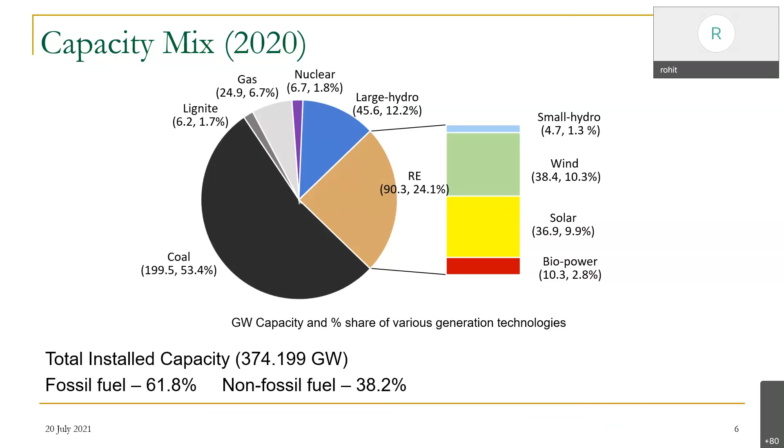The total installed capacity, this is last year's data: the fossil fuel generation is somewhere around 61%, 62%, and the rest is non-fossil fuel generation. So this is the general capacity mix that we have as of now, and this is shifting towards more and more renewables over a period of time. It is significantly shifting.

The targets that the government has set for itself by 2022 are 100 gigawatt of solar, 60 gigawatt of wind, 10 gigawatt of biomass, and apart from that, a target for a lot of small hydro sources. With that, the total renewable energy generation in the country, percentage-wise, take care that this is the energy generation. This is not the installed capacity.

Installed capacities for renewables are usually higher than the share of the energy that they can provide. That is because these renewable sources are intermittent and they do not provide power at all points of time. Because they are intermittent, despite having good capacities, the level of electricity generation or energy that they can provide is significantly lower as compared to the capacity.

So when we talk about capacity, the RE capacity may be somewhere around 40%. But when we talk about the energy that they are supplying, that is relatively low, somewhere around 21%. That is typically because of their highly intermittent and variable nature, which does not provide a consistent level of energy generation from these sources. Hydro, large and small, constitutes somewhere around 12% of generation. Solar, wind, and biopower constitute about 9% of generation. This is the RE mix portfolio.

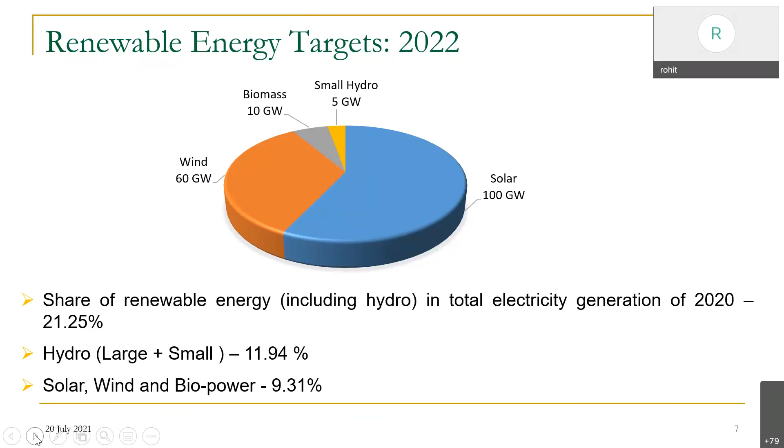Focusing upon the topic of this presentation, that is, what are the challenges with this RE generation? What are the problems that we are facing from the system operator and system planner's perspective? This is what I would like to focus upon today. We all understand there are significant targets and the government is pushing forward like anything to fulfill those targets.

What are the problems? The first problem is the high cost of putting up those projects. High cost of solar panels, high cost of wind turbines, that is one of the big issues. However, over the last 5 to 7 years, the cost of solar generation has drastically reduced, which has helped us to put in more and more solar, fulfill our solar generation targets, and bring down the per unit cost of generation from solar, not the running cost, but the overall cost of generation.

The running cost is obviously negligible in case of solar and wind, but the installation cost is high and they have a specified lifetime; the solar panels need to be replaced after a certain point of time. They do not have a lifetime of 40 or 50 years as is typically the case with coal power plants. They have smaller lifetimes, 20, 25 years is the maximum that solar farms can be operated, after which their panels have to be replaced because of low efficiency and degradation.

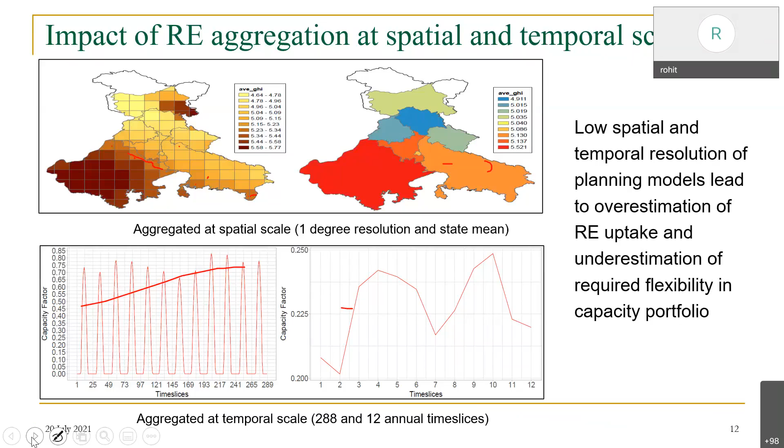Right assessment of the potential is not happening, which is eventually leading to an overinvestment in the system, investment whose money cannot be recovered. We are putting up those power plants, but we are not able to utilize them because of the time at which that generation is available. Possibly when we were doing the planning, we were not able to understand the spatial and temporal resolution of those power plants, and we are not able to derive the maximum generation from those generating systems. So considering that, there is a need to go in for stronger spatial and temporal resolution of the generating capacities.

They will usually take what is the capacity of generation available, what is the peak generation capacity. They will take one figure for the whole year, whereas that figure is not representative of the generation available throughout the year. That figure keeps changing. During some months, that generation is not available; during some months, it is significantly available. So that detailing is not available in long-term energy planning models, which is required to assess the impact of intermittent renewable generation for long-term system planning studies.

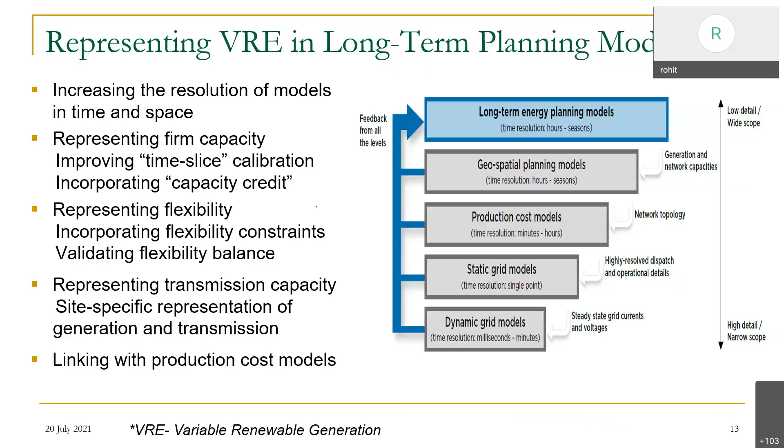So all these understandings help us to do long-term system planning. This is how long-term system planning takes into consideration a larger data set and tries to build up a picture of what the system planning requires, what are the power plants that need to operate. So this was about the planning perspective, how we are doing it.

What are the key innovations that we have done? One of the key innovations that I discussed was going in for a very refined temporal and spatial resolution understanding of the generation from renewables. Another big challenge that is coming up because of renewables on the operation side is that of inertia and the time difference.

The reason is simple. When you've got solar farms or wind farms, as I just discussed, they are connected via inverters, electronic components. Same is the case for wind power plants; they are also connected by electronic circuitry. The turbine is not directly coupled with the grid. So because of that, whenever there is a disturbance in the grid, the turbine in itself is not able to provide that inertial support.

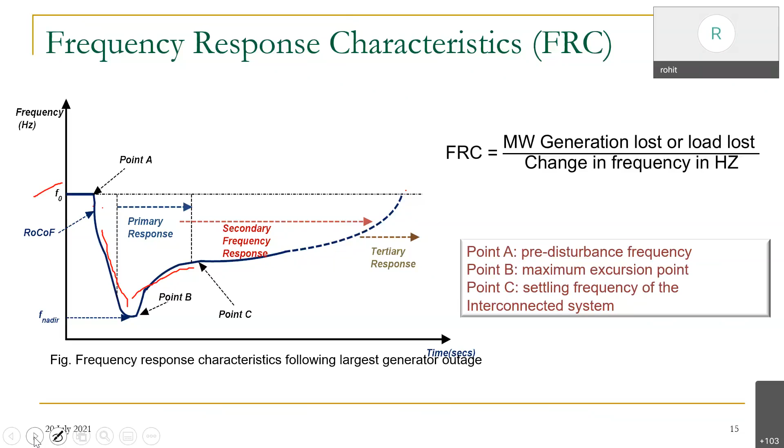So these are the three domains of frequency responses that are being provided by the grid. We'll see how this impacts. The inertial response comes prior to the primary frequency response. The inertial response works in the time frame of 0 to 5 seconds. It tries to maintain the power balance and helps to maintain the transient frequency dip. It tries to minimize that dip. That is the objective of the inertial response.

It works in a smaller time frame. These are the very initial responses that you get from the inertial response, after which the primary frequency control starts acting. That operates in the time frame of 1 to 20 seconds. The aim is again to maintain the power balance and transient frequency recovery as soon as possible. And then the system's secondary control, that is automatic generation control, starts to act in the time frame of 4 seconds to 3 minutes.

Obviously, the automatic generation control mechanisms take some time, but they have got larger capacities and they help to maintain steady state frequency, the transient frequency. Then we also have the tertiary control of the system, which is provided in the time frame of 5 to 15 minutes, generally through economic load dispatch decisions that we do.

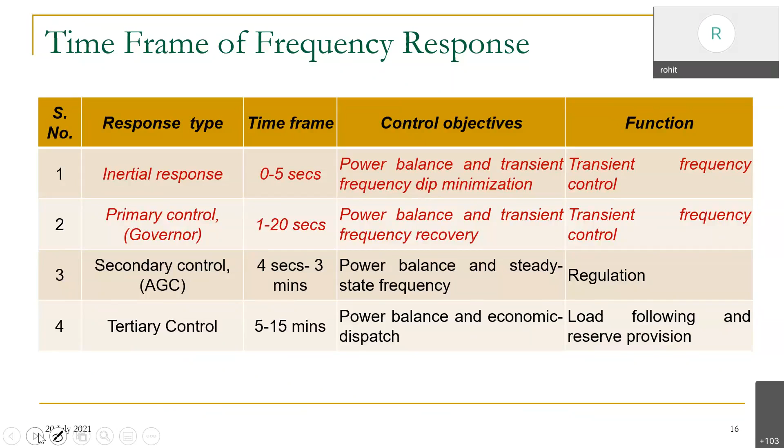Understanding this, the three actions that happen in the grid. The first is the primary frequency control, which happens during the smaller time frame of 1 to 20 seconds. So we have got the generator, the turbine, the governor. The moment there is a problem, this action helps to put more power into the grid; it pushes the generator to produce more.

If this is not able to handle the situation, then we go in for the second level of frequency control, which is automatic generation control, where the inputs are the frequency, the nominal frequency, the power available, scheduled power, the tie lines, and the power lines. Using the automatic generation control, it provides input to the generator to ramp up or ramp down the station.

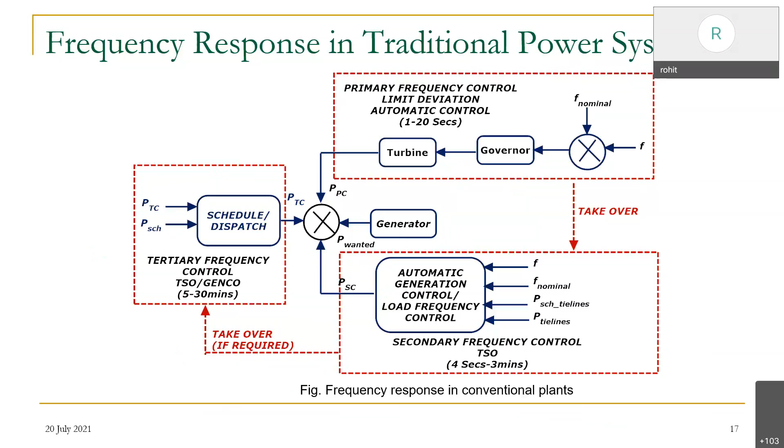Even if this is not able to handle the generation imbalances, that would be taken over by the tertiary frequency control mechanisms by the system operator or the generation company, working in the time frame of 5 to 30 minutes, through scheduling decisions, that is optimal load flow, economic load flow, optimal power flow, dispatch decisions. This is a broader schematic of the reserves, balancing, and frequency management in this country.

Hello, sir. Rohit, sir. Ma'am, you can call, sir, I think. Ma'am, yeah. It's not audible. Yeah, just wait for a few minutes. Sir will be rejoining again. Okay, ma'am. There was some network issue.

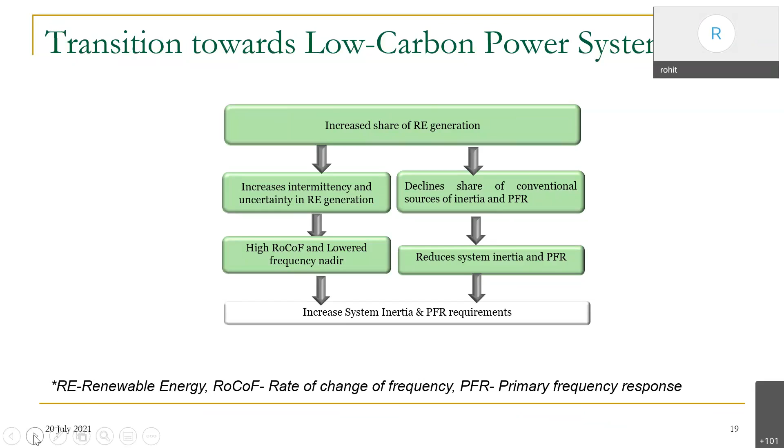That eventually would lead to more stresses in system operation. So these are some of the issues which restrict the capability of the system operator to integrate more and more renewables into the system. These impact the system security, these impact the reliability of the system, because more and more generators would go into outage if the relays start getting actuated.

So we need better governor control in the conventional generators. The governor mechanisms have been overhauled over all these years. More investment is required in the governing mechanism of these generators. Still, there is scope for improvement in refurbishing those generators. A lot of those generators are yet to be improved upon.

Inertia, we all understand, is provided by the kinetic energy of the rotating masses. That is scarce, and it would become more and more scarce if we do not provide an appropriate level of inertia. So there are regulations that have come up from the Regulatory Commission. 10,000 megawatt per hertz of inertia is mandatory to be maintained in the system at every point of time, and 4,000 megawatt of primary frequency response is mandated. That is, this level of primary frequency reserve or primary frequency response is to be maintained at any point of time in the grid.

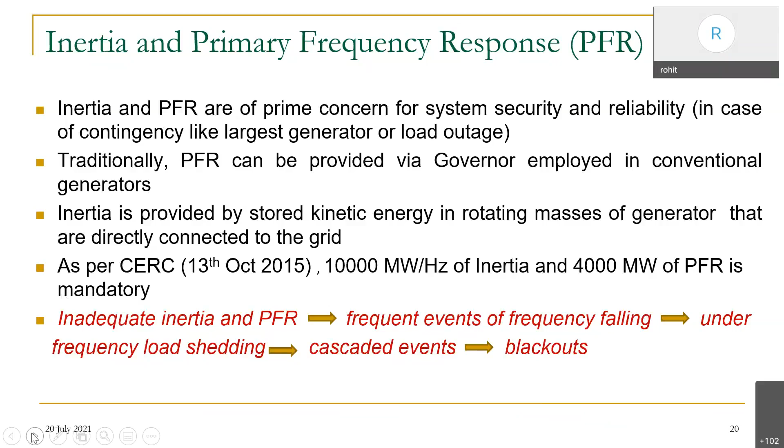This is a learning that has come from the 2012 blackout. Because of that, the system operator was under stress to improve the system operating conditions, which has led to this regulation. After which we have not faced any major blackout in this country over the last 8-9 years. In case you do not have it, we'll be facing a lot of frequency excursion events. Under frequency load shedding would be happening, cascaded events, blackouts, which luckily we are not facing, despite the significant RE penetration over all these years. Still, we are going for a stronger and stronger grid.

Some of the other solutions that are being explored are in terms of putting up more energy storage. So when you're not able to get the required energy from those power plants, other options are putting up energy storage devices like pumped hydropower plants, flywheels, compressed air energy storage, battery energy storage systems. Or you could also operate these RE power plants in a derated state.

That is, if it is a 100 megawatt power plant, you operate it at 80 megawatt so that whatever intermittencies happen, you mitigate or subsume those intermittencies in the power plant itself. So even if the generation level is 90 megawatt, you are still operating it at 80 megawatt. If it is 85, still you are operating it at 80. Even if it goes to 100 megawatt, you are still operating it at 80. So whatever variation is happening in the range of 80 to 100 megawatt, since you are operating the plant at 80 megawatt, those intermittencies can be mitigated. However, it leads to loss of generation. So that is the pitfall of operating these power plants derated.

On the demand side also, there's a lot of discussion on bringing in demand side responses for the grid in terms of electric vehicle responses. We have been talking about aggregating the responses from electric vehicles, about bringing in demand responses like interruptible load, shiftable load, and rooftop solar.

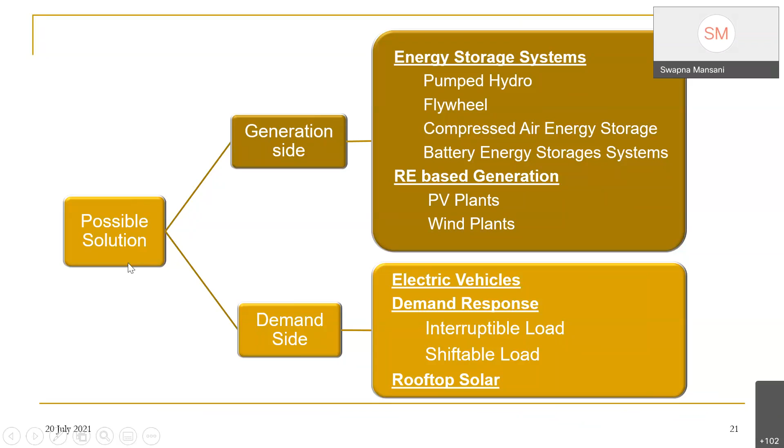I hope I'm audible. Yes, sir, you are audible. Yeah, there was some background noise, so there is no question. Fine.

That was the second issue that we've discussed. Time permitting, we'll be touching upon one important feature that the system operator is quite concerned about. We have been interacting with the POSOCO people for quite some time, highlighting what research we have done, and they are also interested in the research that we are doing and understanding the level of flexibility. Most of us would not have explored the issue of flexibility. There is very little research going on at present in academia. But from an industry perspective, flexibility is becoming a big problem, and there are issues that need to be understood. So this is quite an interesting area of research for system operators and industry practices also.

What is happening is, because of this variability and uncertainty in the system: earlier, the whole of the generation was coming from power plants, and the demand was what was uncertain. When the demand was uncertain, the whole of the generation was increased or decreased to mitigate whatever variation was happening in the demand. So we could fulfill that variation with the help of controlling the generators. If there was an increase in the demand, we would increase the generation level. However, now with a lot of renewable penetration into the system, there is a certain portion of the generation itself which is not controllable.

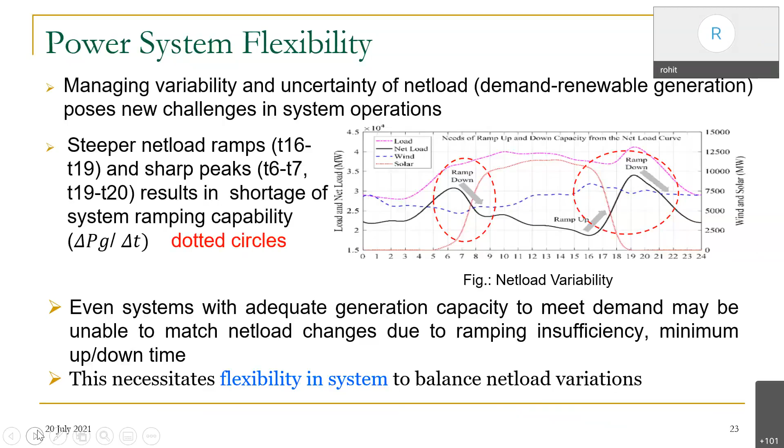How we define it is the extent to which a power system can modify electricity consumption. This is a basic definition of flexibility. There are two facets to it. One is the short-term operational flexibility. That is, the generators do not have the ramping capability in the optimal power flow framework, a minutes to hours framework. We have those resources, but we are not able to schedule them because they cannot ramp up that fast.

The second is the long-term flexibility planning problem, in which we don't have the resources. The capacity is not there. Those types of generators do not exist in the system. So we need to install those power plants which can provide that ramping facility. Typically we talk about gas power plants which can ramp up faster, pumped hydro, and hydro power plants which can start up at a very fast pace. Coal power plants typically require a longer time, so they have limited ramping capability.

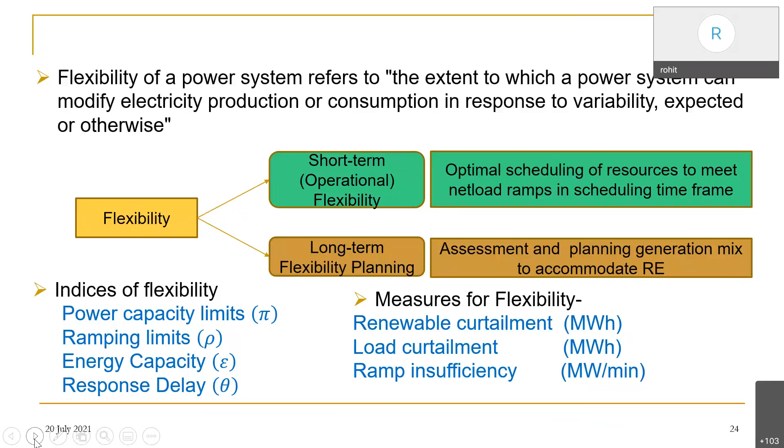Some of the indices that we have been working upon in this segment over the last few years, in terms of assessing flexibility, are the power capacity limit, ramping limit, energy capacity limit, as well as the response time. Some of the measures of inflexibility are the quantum of renewable curtailment we have to do in case appropriate ramping capability is not there, or load curtailment, or ramping insufficiency.

or making investment into the transmission grid infrastructure, or getting more generation side flexibility, or putting in more energy storage systems, or going in for sector coupling, that is, integrating electricity with heat or with the gas sectors. Coupling those sectors can provide flexibility. These are some of the wider research domains that we're exploring, and we see a lot of potential in these in the coming several years.

So energy storage is one important solution that can be explored. This is costly, but yes, they provide very fast responses because they have that capability, especially the battery storage. They have responses that are very fast. So available technologies that people are exploring: pumped hydro, flywheel storage, compressed air storage, flow battery, solid state. All of them are being explored at different applications.

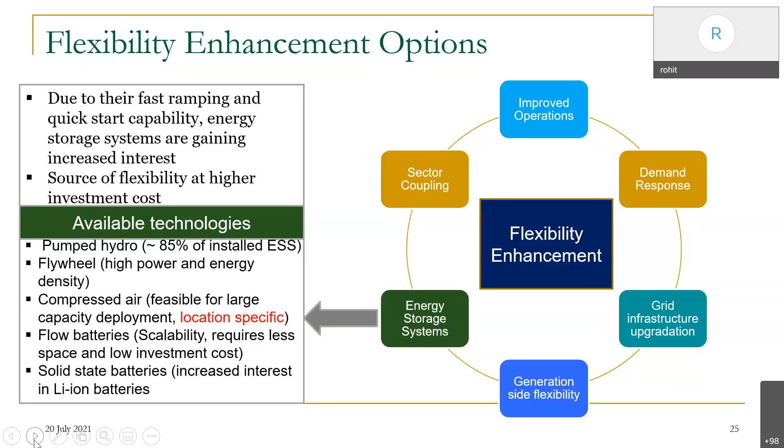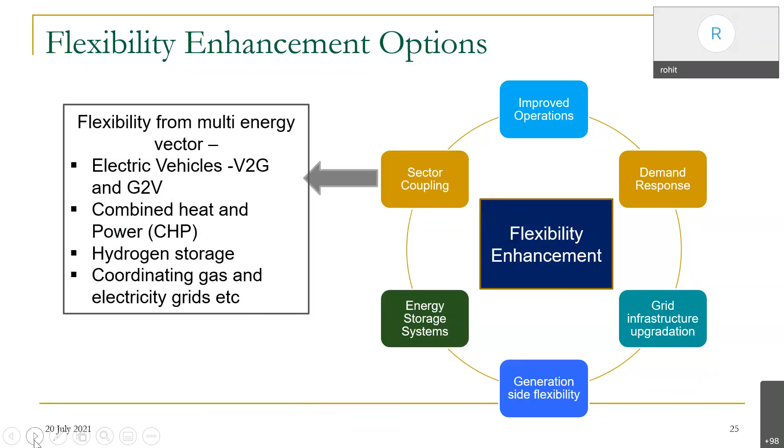Another is sector coupling, in which we talk about vehicle to grid, grid to vehicle, combined heat and power plants, hydrogen storage, another sector, coordinating gas and electricity grids, coordinating heat and electricity grids. These are some of the options that we explore when we talk about sector coupling.

When we talk about operation, we mean reducing the scheduling time frame from 1 hour to 15 minutes, or from 15 minutes to 5-minute interval, so that we can monitor and handle the system at a faster frequency, faster rates. Then going in for better demand and RE forecast is one of the options. Creating improved operation in terms of going in for stochastic reserve scheduling instead of normal scheduling that we do.

Going in for providing market products like flexible ramp products, which can provide that flexibility in the system in terms of providing ramping. Shorter gate closure. Now we have a gate closure 4 hours ahead of the delivery time. That is, the markets close 4 hours ahead of the delivery. If we have to deliver the power at 12 o'clock in the noon, the markets will close at 8 o'clock in the morning. We can reduce that time and handle that uncertainty. This is one of the ways. There's a lot of research into it.

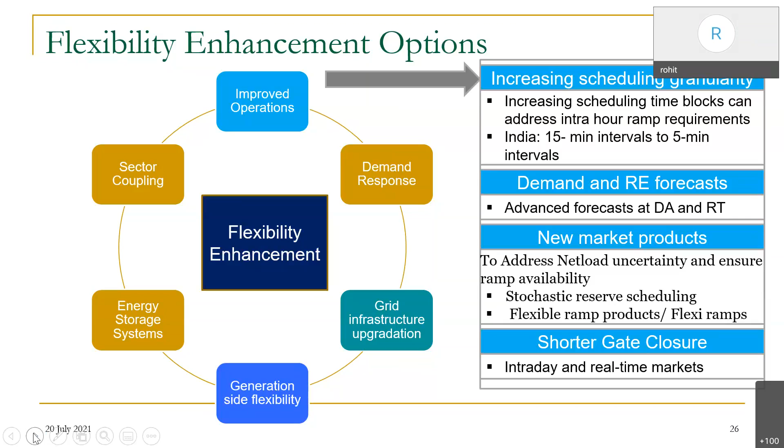This is not a very light slide, I would say; it would require an hour to explain each one of them. I'm just touching upon what are the flexibility options that people are exploring as of now. Demand response, which is one of the least cost options, in which the customers can reduce or increase their demand, shift their demand, that is their load, provided they are given some economic signal, provided they are given some benefit. That can help to reduce the peak demand in the system, reduce the ramping requirement in the system.

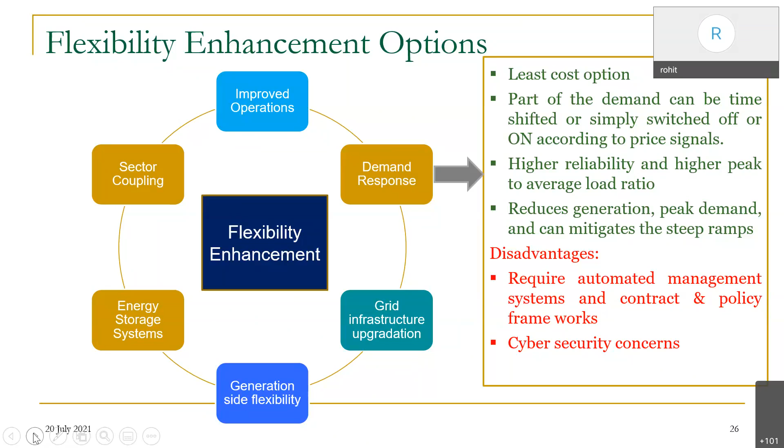However, the problem is that you need to install smart meters, you need to control the load in households, which obviously requires investment in terms of automatic management of that system. Also, cybersecurity issues will always be there when you're controlling it from a remote place. Grid infrastructure will mean making investment into the grid. Generation side flexibility means putting up those power plants which have got better ramping facilities, like gas power plants, or power plants which have got lower startup and shutdown times, like the hydropower plants. These are some of the options that I think we can explore.

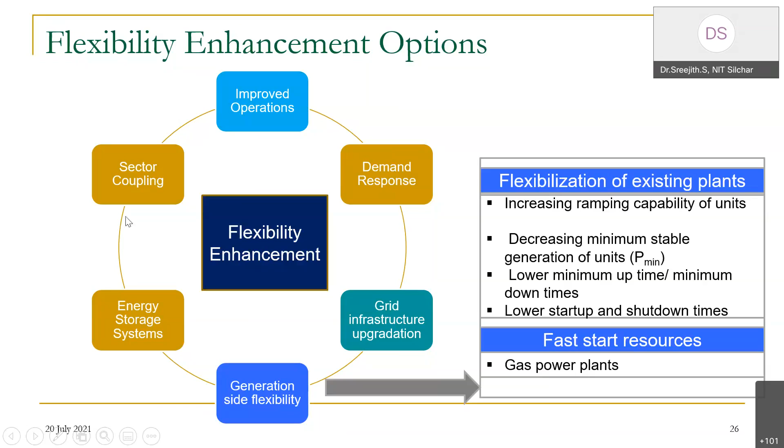I think these are emerging challenges, and we are one of the research groups which are significantly focusing on these challenges, which even industry, the planners, the policymakers, are able to appreciate. And a lot of funding is available in these segments, all these three segments that we talked about, and possibly more.

In the area of system planning, Central Electricity Authority, the NITI Aayog, they are quite keen to understand what is the level of energy storage that we would require, what is the level of RE penetration that we can handle in the system. These are some of the issues that people at the national level are talking about. Startup disruption.

Yes, this would have been one of the topics that I would have discussed at time. Startup disruption. I think with the new Electricity Act coming in, that is there in the Parliament as of now, they would open up a totally new business area on the retail side, in which there would be a large number of retailers. And one of the biggest innovations that can happen in the power sector would happen on the distribution side, in terms of what are the services that the retailer would be able to provide.